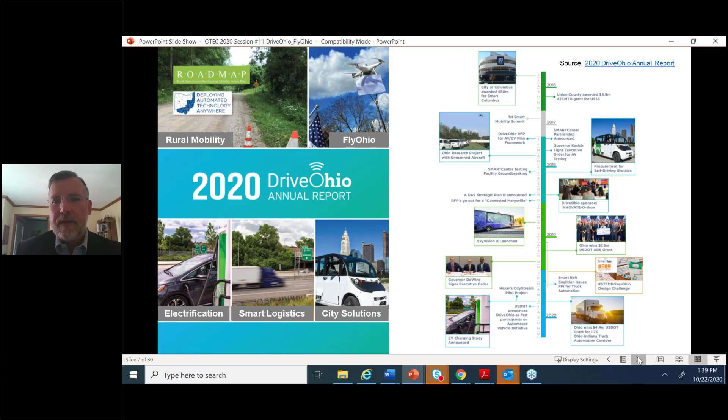City solutions. We talk about 5 focus areas, one of those being city solutions. You can see here on this slide, give it some time, the Linden Leap, the autonomous shuttle that started in February of this year.

I had to do a little bit of a pivot. That's one of the things that's also very important when we're talking about smart mobility — the ability to have a thesis, to learn on the fly, use data to inform those decisions. Like in this case with the Linden Leap, the pandemic was not going to allow a deployment as originally scoped, so instead of moving people, they're moving food between 2 locations in Linden. It's another example of smart mobility — being able to pivot and solve local challenges.

Fred's going to talk a lot about the air side, Nick's going to talk about the ground side, but as these technologies mature, we see them coming together. Over the next 5 years, there's going to be a lot of opportunities and development, some of which came from the current situation we're working through right now.

But again, partnership is paramount. You've got Union County, the city of Marysville, city of Dublin, TRC, DriveOhio, and FlyOhio. It's that complement, that ecosystem of partnerships we can leverage to help solve and deploy these solutions.

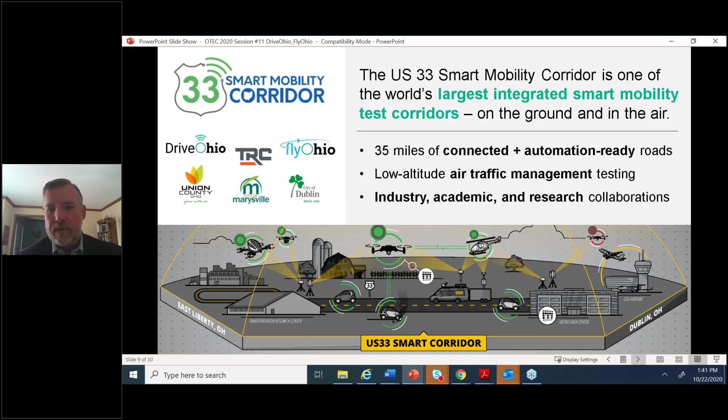A little bit more information about our ADS win. When you look at the development of automated vehicles, a lot of it takes place in urban areas. USDOT wants to get data about more rural applications, and our project fits that bill very nicely. We will get started here.

We're working towards deploying these systems in a more rural setting to figure out what the infrastructure needs to have improved, if there is such a thing. We'll be doing a road audit to see what improvements need to be made for the technology stacks to read, making sure we are focused on safety. That's the one thing at the Ohio Department of Transportation we are always cognizant of: the safe deployment and increased efficiency of our system. So look for more of that at the end of this year and next year.

Another rural application is our roadmap project, coming on the heels of the ADS one. This focuses not only on electrification but also automation, and looks at how, in that rural setting, these technologies are employed and how they can be employed and utilized most efficiently.

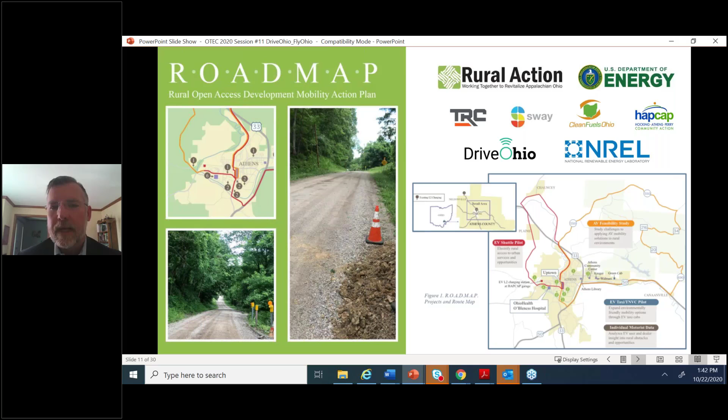Some more - this is the Automated Vehicles AV Pooled Fund. This is kind of thought leadership. This is a program we're calling the crossroads of America, I-70 and I-75. The amount of people and goods that travel through those two thoroughfares is unprecedented. It's a major thoroughfare, east, west, north, south in the United States. So taking that partnership between other state DOTs that are thinking about this in innovative ways, we hope to develop, whether it's deployment standards or interoperability standards, just to start a conversation with multiple states focused on automation and deploying these across the nation.

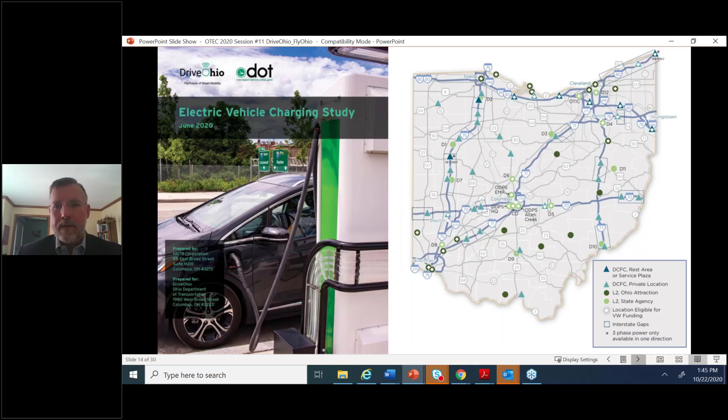And again, thought leadership - DriveOhio was lucky enough to be part of the AV Test Initiative through NHTSA. We also have a great partnership with PAVE. These are two ways we can engage with industry and government to facilitate conversations around automated and connected vehicles, on the ground and in the air, here in the state of Ohio, to reinforce our leadership position when we're talking about national standards and deployments.

So with that, it is my pleasure to introduce Fred Judson. Fred is the director of the Ohio UAS Center. He is our ace in the air, as we like to say. Fred has been an ODOT employee for over 26 years. He has leadership positions on aerospace and unmanned aircraft systems across the United States. I was talking to one of his colleagues today - I think he's going to be presenting something in Portugal either this week or next. So Fred is a leader when it comes to unmanned and advanced air mobility. It is my pleasure to introduce Fred Judson.

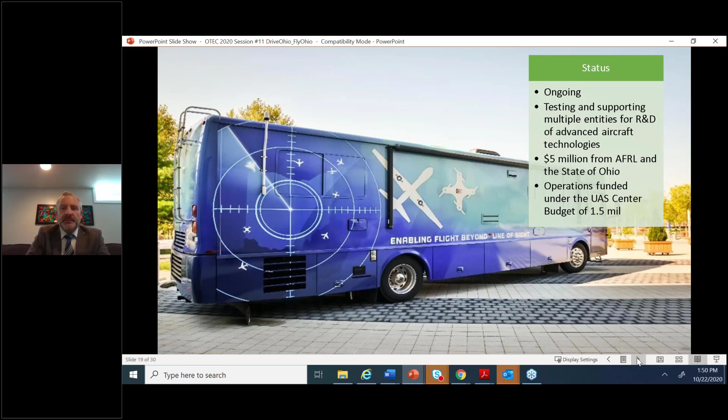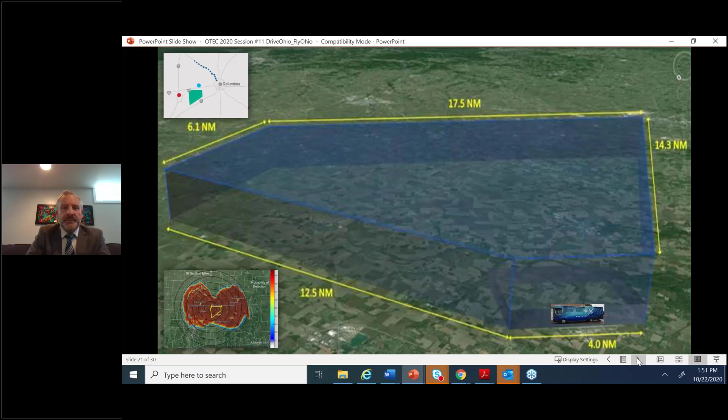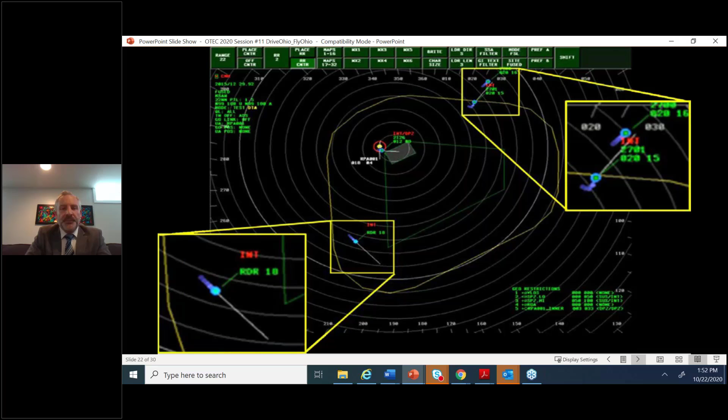Before I get into unmanned aircraft traffic management, I do want to say that in the SkyVision asset, we are performing aircraft operations of all sizes, supporting logistics, small package delivery, and larger logistics type aircraft. They're able to do short, medium, and long haul operations, but also the movement of people, which gets into the flying car concept, which I'll talk a little bit more about.

Another research project we have with the help of our Office of Research is the Unmanned Aircraft Traffic Management System. Currently, the configuration is three radar installations along the 33 Smart Mobility Corridor, working with our ground transportation systems. Our goal for this project is to do beyond line of sight unmanned aircraft operations along that corridor with these radar installations. There's some exciting new developments I'll talk about before the end of this. This allows not only long range data collection type activities, but also package delivery, which we'll get into in the next couple of slides.

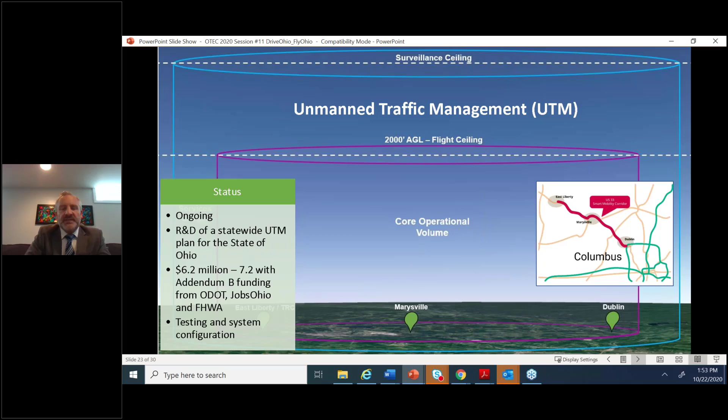One of the unique things about this research project that separates us from other areas in the U.S. doing this type of research is our interaction with the unmanned aircraft and our ground connected vehicles. Realizing we've got a large investment along the 33 Smart Mobility Corridor, we wanted to see where the intersections of the air and ground meet. That's one of the uniquenesses of that research corridor, and one of the things that separates Ohio from the rest of the states.

Before I get into NASA, I want to say that the exciting change to the Unmanned Aircraft Traffic Management Research Project is that we will be moving one of our radar installations to the top of the ODOT headquarters. So in the very near future, our radar will be sitting on top there supporting last mile package delivery, supporting a medical use case in Columbus. That's an exciting advancement you'll be reading about in our press releases in the coming weeks.

Some other ways we support advanced air mobility is with NASA. We're currently working with NASA Glenn assessing where these vertical landing takeoff aircraft will eventually be taking place, whether in urban or rural environments. We're working directly with NASA Glenn analyzing our urban centers for potential vertiport placements. If you're in the audience and in an urban center, we are either reaching out to you, or we will be reaching out, to help NASA develop their tools to look for potential vertical land takeoff locations. These may support logistics, or the movement of people, but it's really the larger aircraft and vertical landing takeoff aircraft taking place in urban centers, and working with them on what that future airspace will look like.

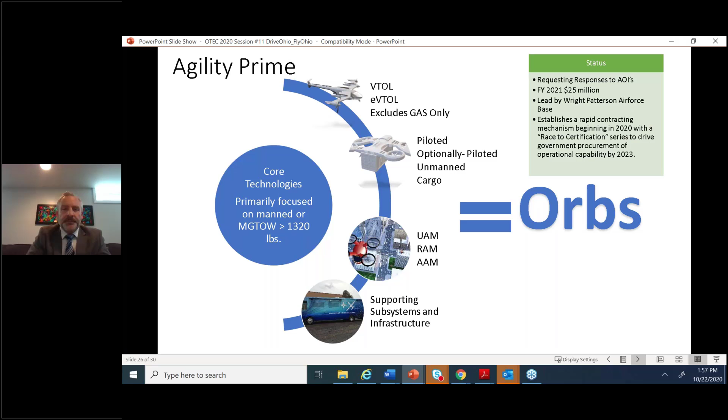Getting into some of our other projects, we have a pooled fund request out there looking at vertical landing takeoff aircraft for the movement of people and goods within the airspace. We made it a pooled fund study because we are focusing on the I-75 and I-71 corridors, connecting our urban centers and major thoroughfares for logistics.

It will focus on interstate commerce, on what the new vertical landing takeoff technologies will do for us, with demonstrations taking place of the movement of people and goods with the new technologies between Columbus and Dayton. It is a 36-month study that will be taking place.

We currently have backing from Texas and Michigan. We've got about 5 other states that are looking to join us. Once we meet that $2 million contribution, this project will kick off as an official project, and we'll be reading a lot more about what happens after that.

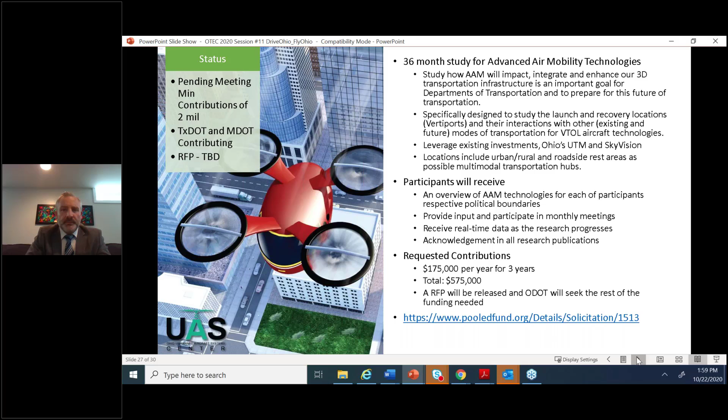We are excited to announce a 6-month study for the economic impact analysis for the state of Ohio with all the new vertical landing takeoff aircraft technologies. That's going to be headed out of the University of Cincinnati with Crown Consulting. A lot of stakeholders are probably in this meeting right now, and there will be a survey sent out in the coming weeks on advanced air mobility technologies and what that means for you, as well as stakeholder interviews. So what we're hoping to gain out of this research project is trying to assess what is actually going to happen for the state of Ohio.

NASA and the FAA have produced their own studies, but that was for nationwide. What this study is going to do is mimic what NASA and the FAA have done, but actually get into Ohio as the focus and produce the information we will need as we move forward in our planning efforts.

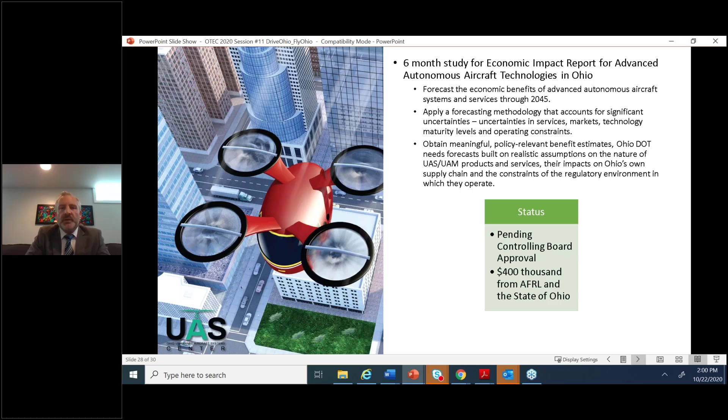Last one is a 24-month study that we just proposed for a research project. That will be looking at a combined sensor network. As the Department of Transportation, we care about enabling this technology, and there are a lot of others installing sensors around Ohio, looking at the lower altitude airspace. We are proposing a combined lower altitude framework where we can take all these sensors and bring them to a clearinghouse to meet all the needs for all the different entities, whether they're airports, our Department of Corrections, or the Department of Transportation, or any other potential stakeholders, so that we might be able to leverage everyone else's investments and move together as one Ohio. So we're excited for that project as well.

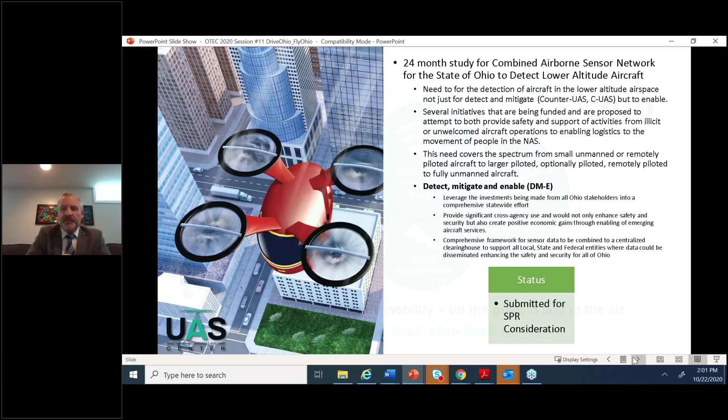And I think that was my last slide. Oh, and then the combined slide with FlyOhio and DriveOhio, and us moving together, whether it's connected on the ground or in the air, advancing all the new mobility solutions that are out there.

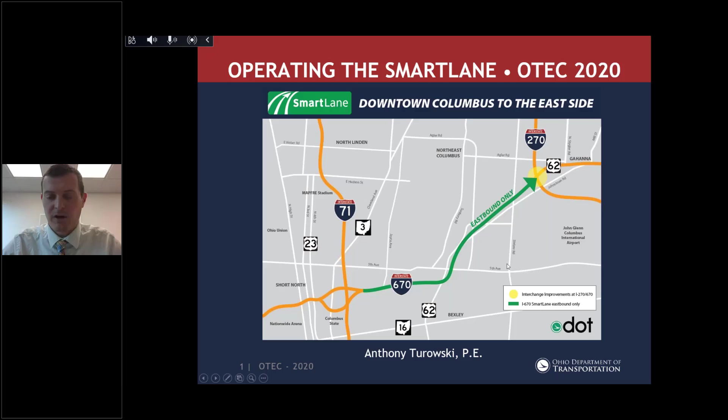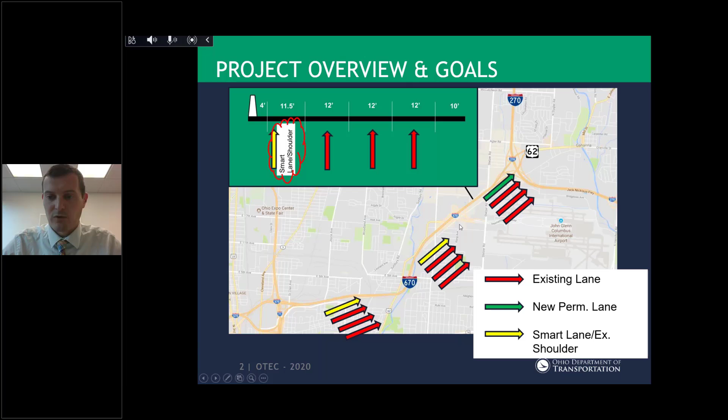We used some technology to implement Smart Lane. What that looks like is using the existing footprint of the roadway to basically use that shoulder, as you can see in the upper left-hand part of your screen, as a part-time lane. We use technology to open and close that lane in the afternoon or when there's an incident or when we're doing construction to push additional traffic through on this corridor. So typically it's 3 lanes out there most of the day, with that shoulder available for maintenance. When we need it, we open it up using a variety of technology. Had an interchange project at the east end of this as well to help with improving conditions out there, and we'll talk a little bit about that later.

We have continuous camera coverage out here on the corridor. That's really key for a variety of reasons, both to let the operators see everything that's going on out there and just make sure there's no issues out in the smart lane while it's open and prior to opening it.

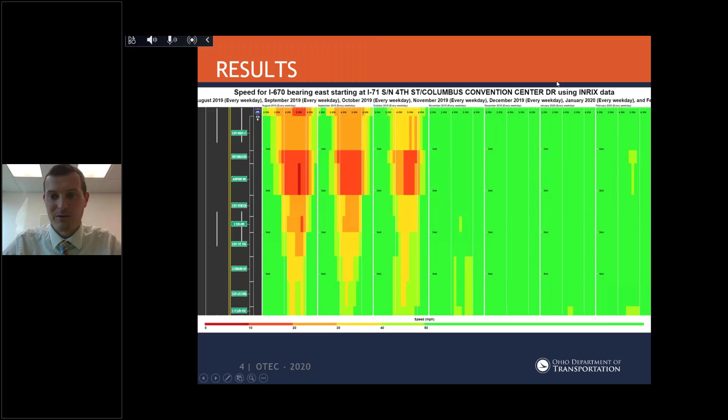To the right is what we have after opening day for the smart lane, which was about a year ago, October of 2019. Seeing a sea of green is pleasing to the eye on this chart and even better out in the field. So I'm pretty happy with that, and that really tells the tale.

The next graphic is not COVID cases, which is what you might think first. It's actually travel time index. It's a measure of how much time you need to budget for this corridor. So if it's 1, you can basically assume that I'm going to leave at 3 p.m. and get to where I want to go at 3:05. I don't have to budget any additional time.

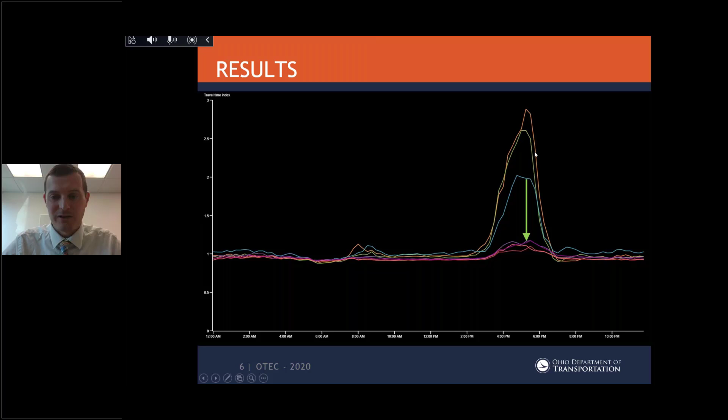And if it's 3, I need to budget 15 minutes to assure that I get out there. So what we've done is made that a lot more predictable. We've flattened the curve. Before, that was the hip trend. You can basically count on getting through here on time now. So that's really great results.

So with that information, it's good. We had our opening day, we've had some really good results. That was fun, but why else have this presentation other than to pat ourselves on the back? It's actually to share some information on how the smart lanes operated over the first year and take some lessons learned, both for future ODOT projects and elsewhere in the country. So I'll compare a few things about what we expected would happen and what actually happened.

The largest change was actually the posted speed limit. So 670 was posted at 65 miles an hour prior to the smart lane project, and we planned to operate it at 45 miles an hour. The reason we did that is there are some geometric constraints on the route, and we also expected that even with our improvement, it would still be pretty congested.

We didn't expect that people would be out there and able to just travel at free flow speeds. We still expected that there'd be issues. We knew this would be an improvement, but we didn't know we would actually see opening day speeds averaging about 54 miles an hour. So we kind of imagine people are out there traveling an average of 54 miles an hour. That means some people are traveling 45 and others are on the other end of the spectrum, up at 65.

It's a lot better. It's good because we had the interchange improvement and the additional capacity from the smart lane, and of course we designed for a 20-year period of growth, so we haven't experienced that growth yet.

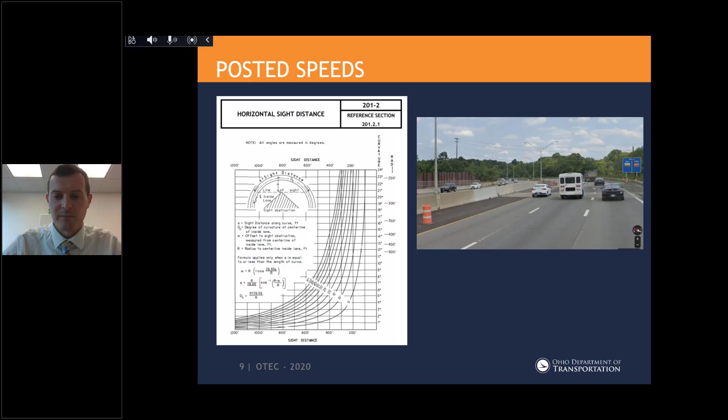So what we did is we actually added some fixed cameras out there. They could observe that location and make sure our operators could see there was no small debris there, like a lost bumper or something you couldn't see coming around the curve. By adding a few thousand-dollar cameras — small expense in the big picture — we could actually increase the speed and get a little more flow through there. So it's a good chance for technology to mitigate the limitations of the existing footprint. That was a neat change.

Transitioning to the next thing I want to cover was construction activities. Obviously we had a 1.5-year long project, so we had a lot of experience out there. But really, one of the initial concepts that's always been part of the playbook for Smart Lane was to use it to allow us some flexibility in our work zones.

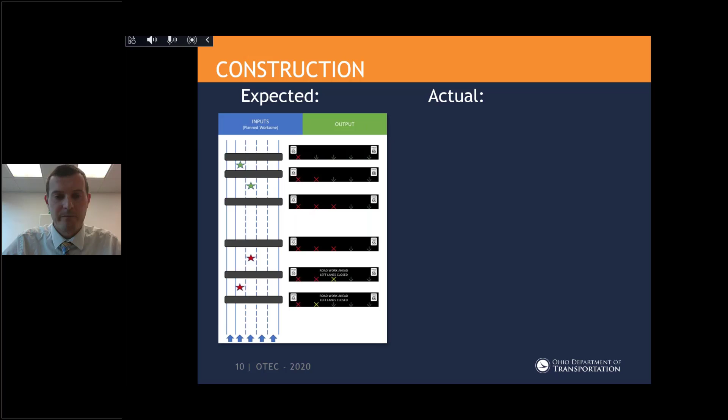On the left-hand side you can see some of the planned messaging we have for the public when we have workers out there doing preservation work in eastbound 670 or something else like that. The messaging didn't really change. What we found was that we really needed to build up our communications.

On a typical ODOT project, the contractor controls the timing. They control the setup and tear down of the signs, and they have the ball. They have contractual restrictions, of course, from us — they can't be closing a lane during the afternoon rush hour.

But now with the overhead signs and variable speed limits, we needed a lot tighter interaction between the contractor, the ODOT staff, and the TMC operators, because it would be bad if we had a conflict between the lane use signs and the barrels on the ground, or two different speed limits. So we developed procedures, plan notes, just to make it more rigorous and get a really good working relationship between the contractor and our operators.

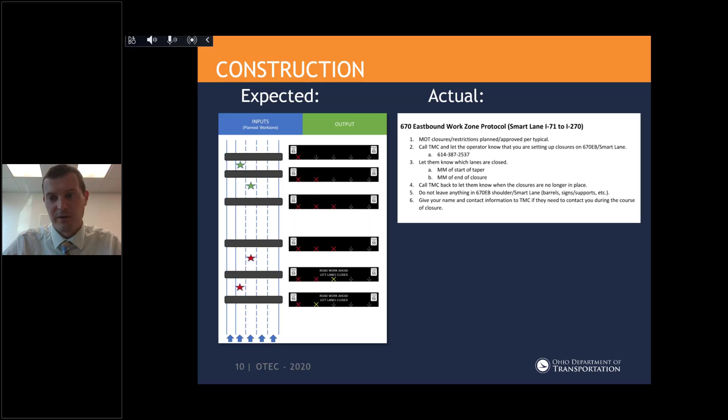After we got through that, things went pretty well. I think we have a good routine for future projects, and things are going to work out pretty well. But that's a big takeaway — you really need that positive assurance of what's going on out there and when things are torn down. Normally, if a contractor finishes an hour early, that's no issue, it's a bonus. But if they tear down the barrels and don't communicate to the operators, that could be an issue as far as mismatched signage. So that's a pretty important takeaway.

Another thing we have is the expected need for sweeping and freeway service patrol. On the upper left-hand side, you can see one of the dedicated tow trucks we allocated to the corridor. This is kind of a heavy rig, meant to be able to tow something up to the size of a box truck every day. The idea is they can drive the route on the shoulder before it opens up, and if something's broken down out there, they can remove it and tow it away to another off-ramp or somewhere safe until someone can recover the vehicle.

What we found was that really wasn't happening very much. There just wasn't much need for it. In fact, as they're doing their debris sweep prior to opening the Smart Lane, it was really small stuff, and without a tail bed they didn't really have a chance to put it somewhere. So you'd see him having to throw it into a closed shoulder until they could send somebody else to pick it up later.

So we changed that out to a more traditional freeway service patrol truck. They're still doing the sweep before every opening, but now they have the ability to clear out the lane. So that was a good tweak, not a huge issue, but a little takeaway.

Another thing that's coming up is that we expected to have some situations where the new Smart Lane couldn't be opened because of rain or snow. What happened was we used to have a nice wide shoulder, and we moved traffic 11.5 feet closer to the median wall. So what used to be fine, that got a lot of room for ponding water, that's no issue. But when you have cars going towards it, you don't want that situation because of hydroplaning.

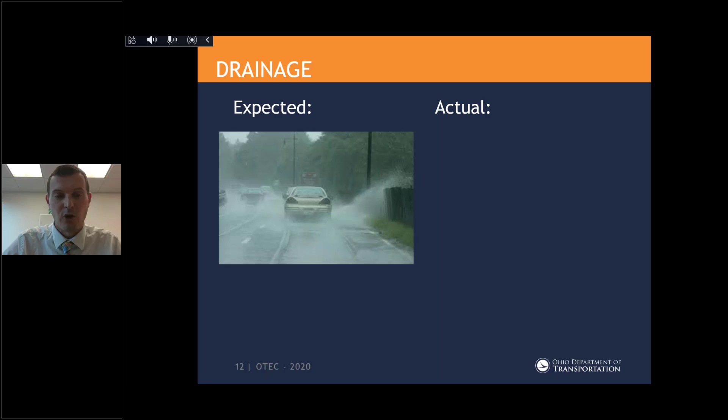So during design, we made the conscious decision not to upsize a lot of the storm sewer. We did upsize a few locations, but we said, hey, if we have a 5-year storm, that's not very frequent, we can just rely on the operators to observe conditions in the field, and if it's wet and ponding, we just don't open it for that day. Same thing with snow storage. So that's what we were expecting, kind of a conscious trade-off for cost.

What we experienced was kind of surprising, a very mild winter for Columbus. So we did not have any situations where we did not open the lane for rain or snow. Can't probably rely on that long-term in Ohio, so we'll observe this fall and winter what happens, and we'll report out in the future.

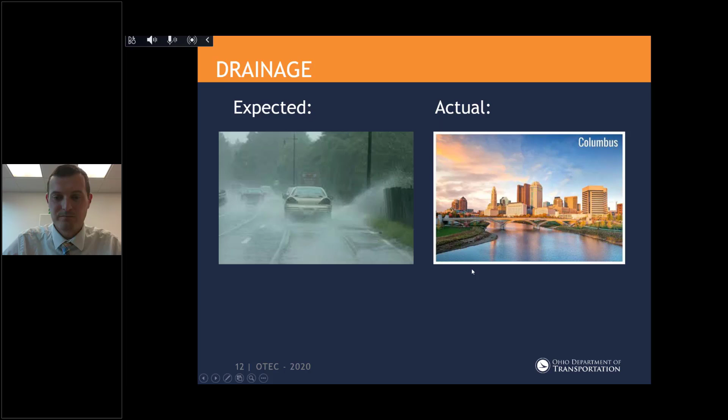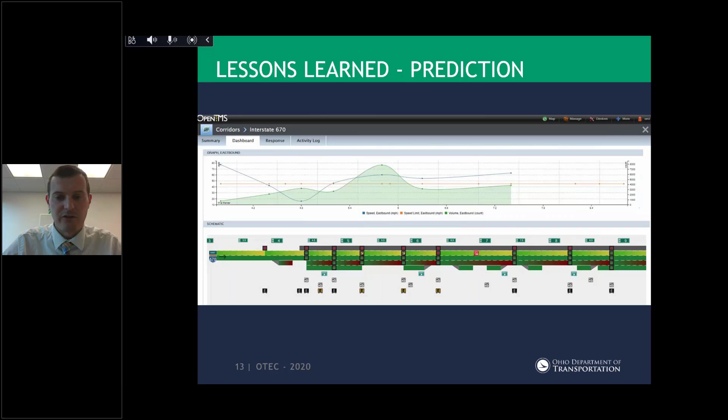But what we found is that the operators get a good feel for what's going on out there before they really see the data changing, or at least concurrently with it, and they can make a prediction of what's going to happen. One big takeaway was that a lot of the time, as you saw congestion on the on-ramps from 71 and the ramps to and from Leonard Avenue, at the very beginning of the corridor, as those started to break down or get busy, it would affect the rest of the corridor. So they honed in on that and observed how those locations were doing, and as those started to break down, they would open up the Smart Lane proactively before the speed started to drop on the rest of the corridor.

So again, this is a situation where the data is helpful, but the operator's knowledge and judgment is key to keeping things running out there.

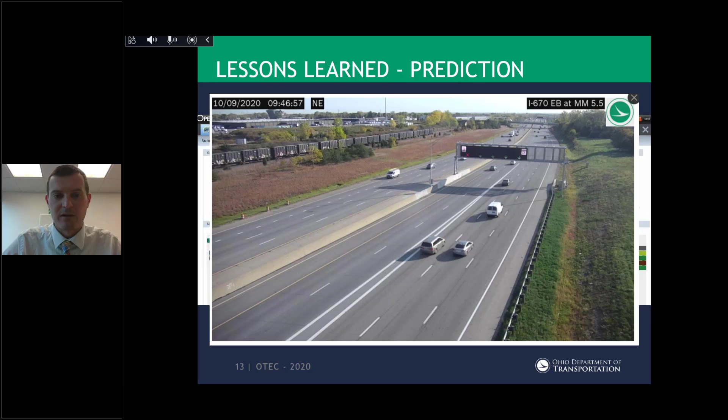I do want to take this time just to thank the TMC staff. A lot of these lessons learned are from them. It's been really good to work with them - the design, construction, and planning staff. We don't really get a chance to talk with the TMC very much, except maybe when there's a bridge hit. So it's been a good chance to work with them, get to know them, learn their perspective and what goes on out on the road. Their input during the design phase and leading up to opening day and afterwards has been really key to the success of this project. I want to share that as anybody else is looking at these installations, make sure you're considering the operators as you work through design and construction.

I'd be remiss if I didn't talk about COVID. I'm sure that's dominated some of the other sessions at OTEC today. What you've seen is that volumes took a nosedive in March with stay-at-home orders, and that affected the need for the smart lane to open every afternoon. If we have 50% fewer cars, we're not going to need to open it. So in fact, ODOT has not opened the smart lane due to congestion since March. We've continued to use it for incident management, albeit more infrequently. But I'm actually able to share that we're gearing up to open it up in the coming weeks. We're working through kind of a clean out sweep with our street sweeper and operations folks. So stay tuned - I expect it to get back into operation as our traffic volumes trend upward.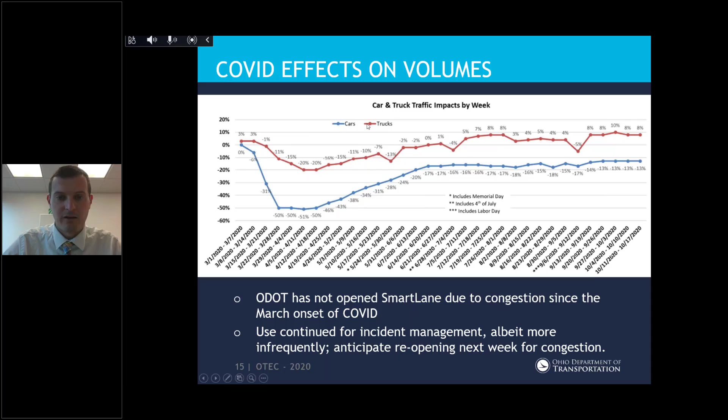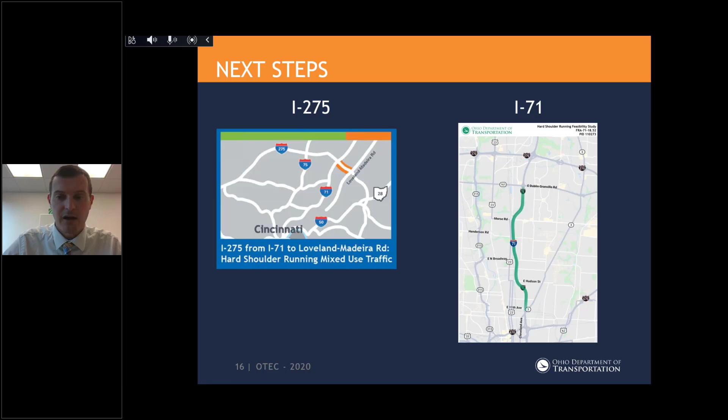Next steps for future smart lane installations and other TSMO initiatives: we have 2 other locations in the state of Ohio coming up. The next one moving towards construction in 2022 is the Hamilton 275 project, in the northeast quadrant of the Cincinnati metro area. They're going to use a smart lane type installation to provide additional capacity through a pinch point up there, so excited to see that one get built and implemented. And staying here in Columbus, District 6 is also studying Interstate Route 71 on the north side - a pretty tight area, very built up, with a lot of incidents and slowdowns every day. So we're pretty excited to see how we're able to implement something out there.

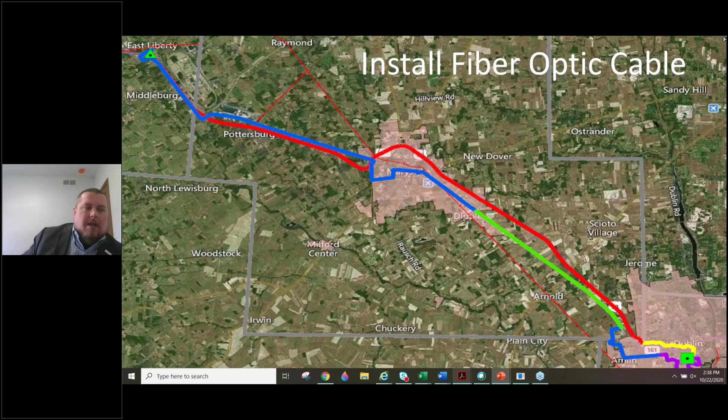So this really sets us up to do a little bit more of the technology base, and allows us to expand with the future as technology grows.

Curve speed warning will focus on those cloverleaf ramps, really giving the motorist an idea of the geometrics of the roadway, what the advisory speed limit is, and then the opportunity to grow the technology for that application further, as far as producing an alert for the type of vehicle as well, the vehicle dynamics. So a box truck might get a different alert than a sports sedan.

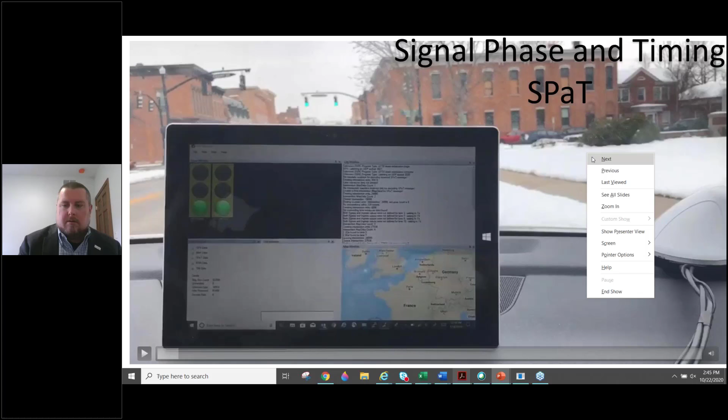One other application that I will show is the pedestrian application. You'll see here on the right hand side the application where the pedestrian is actually noticed with the red box, and we're actually seeing the pedestrian on the thermal camera down below. And the thermal camera is here.

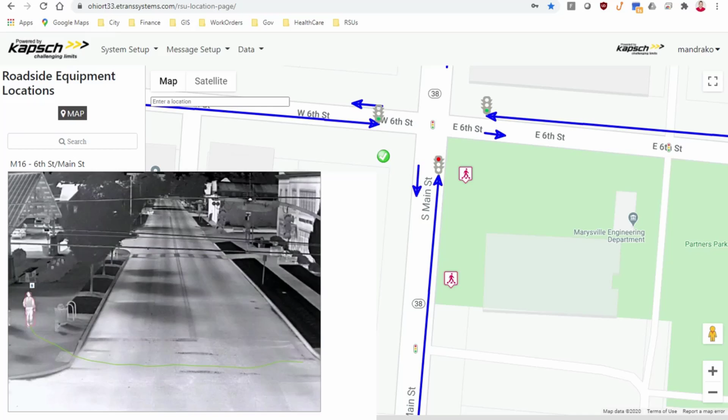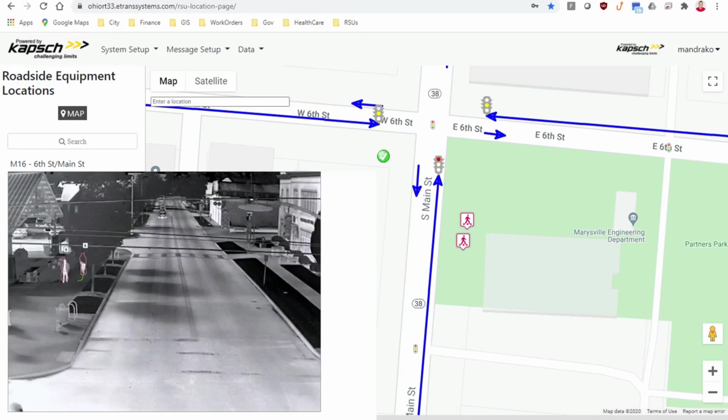Sorry about that. So what actually is happening is the pedestrian is actually moving across the road. The video camera is actually picking that pedestrian up, sending its metadata to a device within the cabinet, and then let me just replay that.

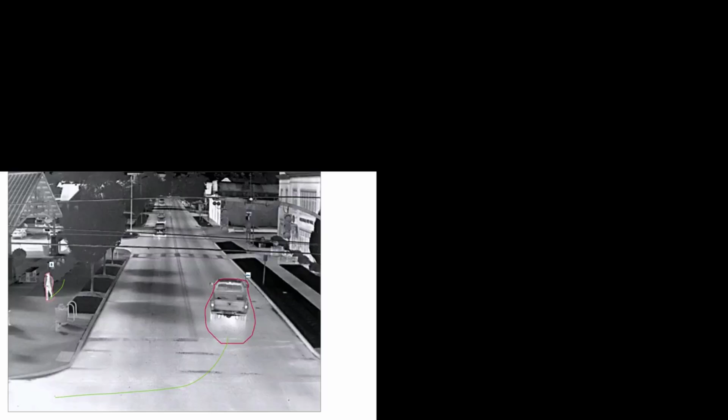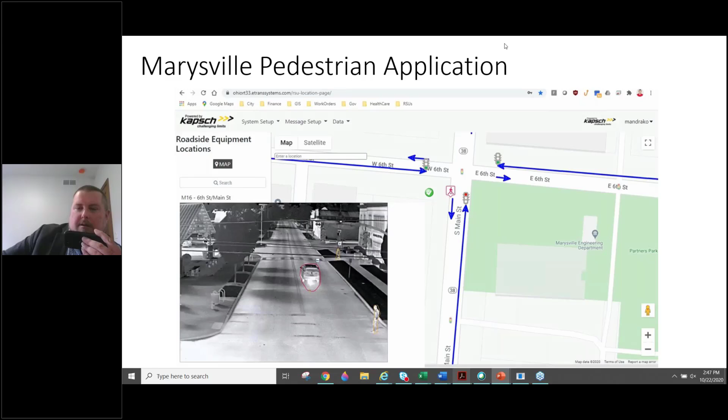It's actually broadcasting that out to the vehicles via the V2X communication. I'm going to switch back over here to the screen and talk about the wrong way warning application, and it should pop up here in just a second.

We did this and we were fairly successful. MIC tracking was one of those things that worked well - MIC is the type of camera, the model of the camera made by Bosch.

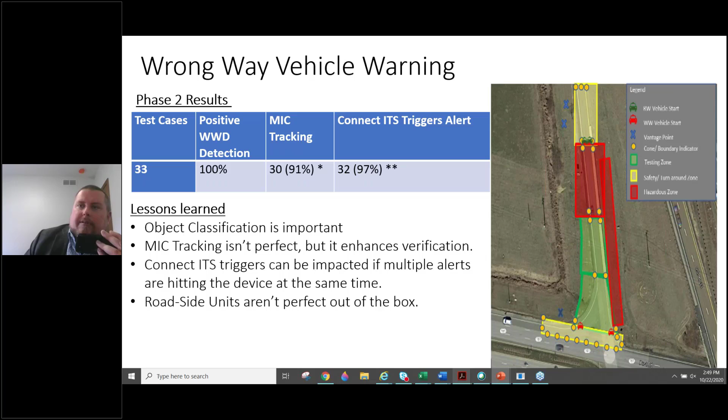One of the things with vehicle tracking is the speed and other vehicles traveling in the right direction can interfere with tracking of the wrong-way vehicle, because it tracks the vehicle with the highest resolution or biggest object. So one thing we can get out of this is verification that a vehicle did drive up the ramp the wrong way.

So it did associate us with a signal there. It looks like maybe Avery Road reached there as well. And that's really all of my presentation.

You can see with all the testing going on along the corridor, both on the ground and in the air, and tying in John Puente's data initiatives, we're really trying to make this the corridor where everything's tested and all of these use cases are proved out. Thank you.

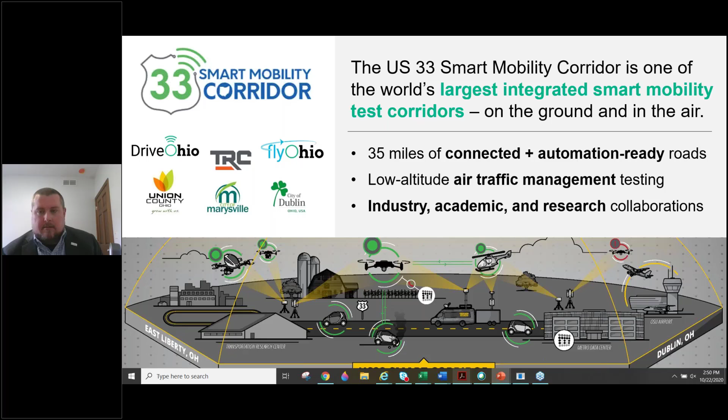Thank you, Nick. Hey, Victoria, do we have a hard stop at 3 o'clock? We do not, so you can feel free to start reading questions if you would like.

I will. First of all, I want to thank everyone who presented today and all of you for joining us. I'm always blown away by the innovation, the partnership, and the outside-the-box thinking when it comes to these initiatives here at ODOT. My first question to the group: all of these deployments are innovative - during your project, whether design, deployment, or bringing it from paper to fruition, what was the secret of the innovation?